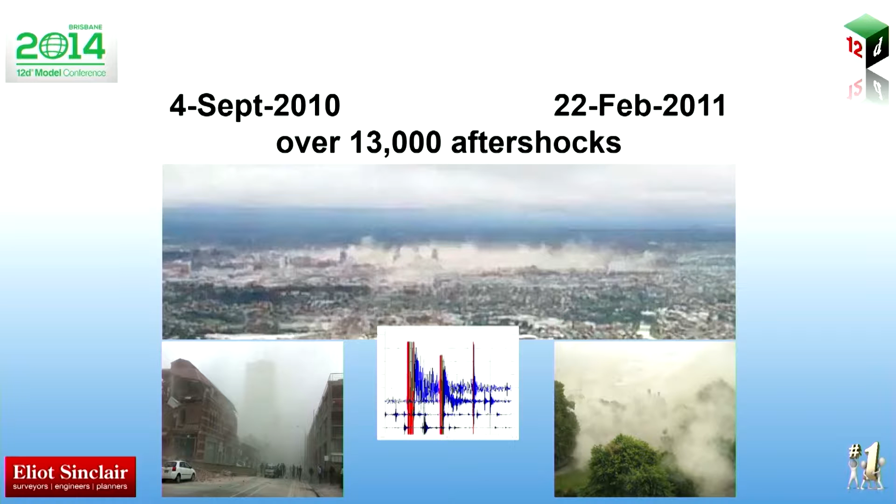The reality is that we still remember this like yesterday. It was 4:35 a.m. in September, and 12:51 just after lunch in February, the devastating quake that killed 180 people. The aftershocks, there were lots of them, but they mainly stopped. In the last 6 months we felt only the occasional quake. But most of us are still on high alert, mainly when a bus or train passes by the building and rattles it. Of course, most of you probably wouldn't have noticed that. So our lives have changed in this very short report.

Well, I hope that you find something positive after all that sadness. On a serious note, 1,000 buildings have been demolished in the CBD. It's quite unbelievable and really difficult to illustrate.

151 Kilmore Street, the Eliot Sinclair offices, pre-quake in red. The day after the earthquake, there was lots of damage: liquefaction, broken roads, collapsed buildings. Demolition followed, and construction began. Two years later, all the areas in yellow are sites that have been cleared, and all the areas in between are sites that will be demolished or have been demolished by now. The location of our old offices is now a new medical facility. This is the only building in that city block. The road is still a dirt road, but this is a sign of progress.

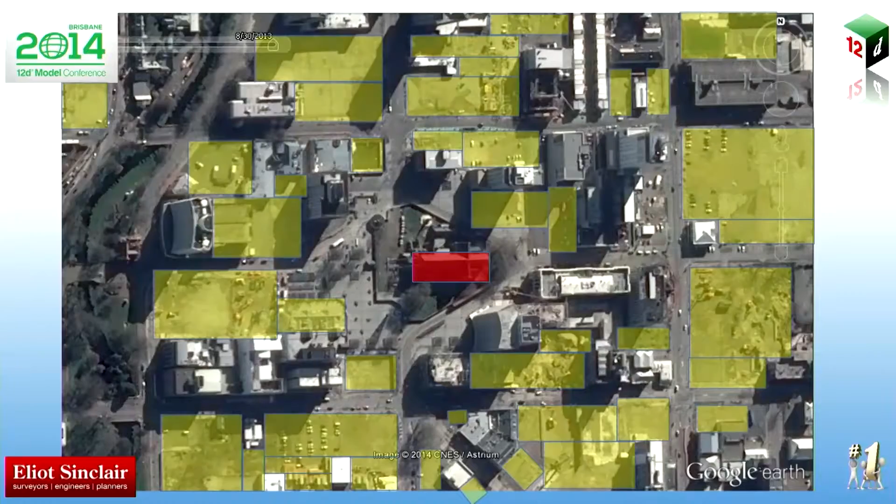The cathedral in red at the square suffered quite major damage during the two earthquakes, and the subsequent aftershocks caused the entire front facade to collapse. Again, this time last year, all of these sites have been demolished.

The Royal Commission investigated the performance of people and systems during the earthquakes. One part of the inquiry focused on the CTV building collapse during the February quake, which resulted in the loss of 115 lives. Closure for the victims' families is vital, and I hope we will see some tangible changes and accountabilities as a result.

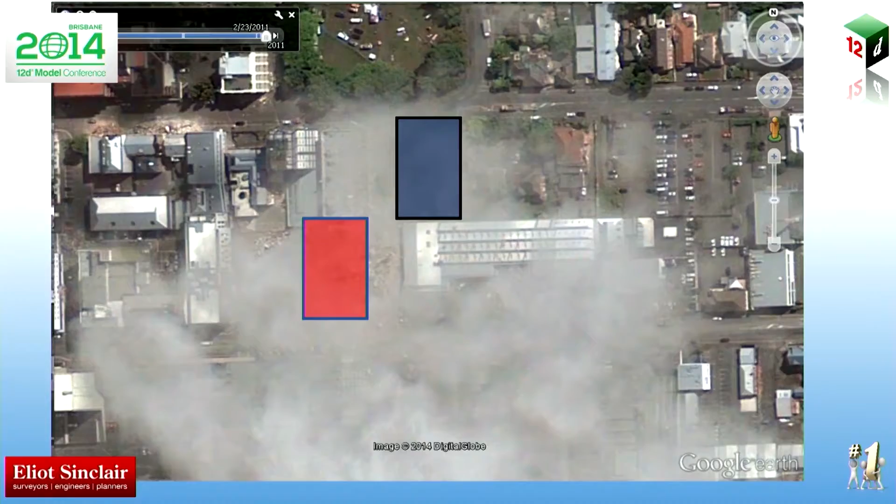The CTV building site is shown in red, and the location of the new temporary cathedral is shown in blue. It took days to check the site for survivors and fight the fires. But slowly, after the site was cleared, demolition started in the area, and soon enough you could see the footprint of the new cathedral.

And again, here are the sites that are now clear. These are just 3 small areas of the CBD, and there are many more just like these. One could say virtually the entire CBD has been demolished.

We can probably share quite a few stories about the bureaucracy, the insurance, what may or may not be covered, how you pay for insurance, and you may see little for it. Many in our city still wait to hear about their claims and where they're going. For example, my house is still under assessment almost 4 years after we've lodged our claim, and my daughters, who are 4 and 2, don't know anyone else but parents who are stressed over the claims.

But funny enough, we are the lucky ones. We have friends without insulation, with plastic for windows, plywood for walls, no cladding, and absolutely no idea where they're going. So you can imagine how depression and anxiety set in, and I'm told it is widespread.

No matter how resilient people look and how well you know them, the chances are they went through or are going through rough times. And adding to this stress are the 2014 floods in Flockton Basin in Christchurch, and just 2 weeks ago, devastating floods in Northland. So if you have families in those two areas, you've been hit twice.

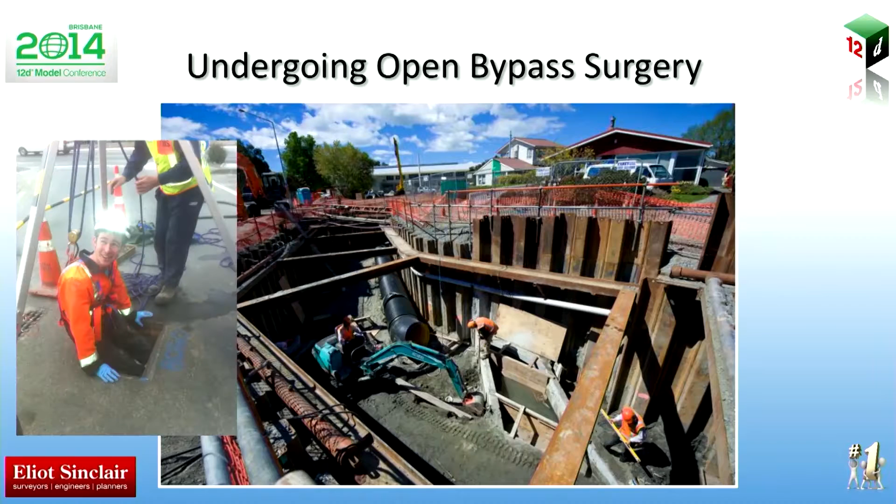It is quite vital in our city of rivers that these remain open. There's one big pipe, one big hole, and the road is closed. Measuring wastewater manholes has been a lot of fun for our surveyors, and funny enough, no complaints by the smell.

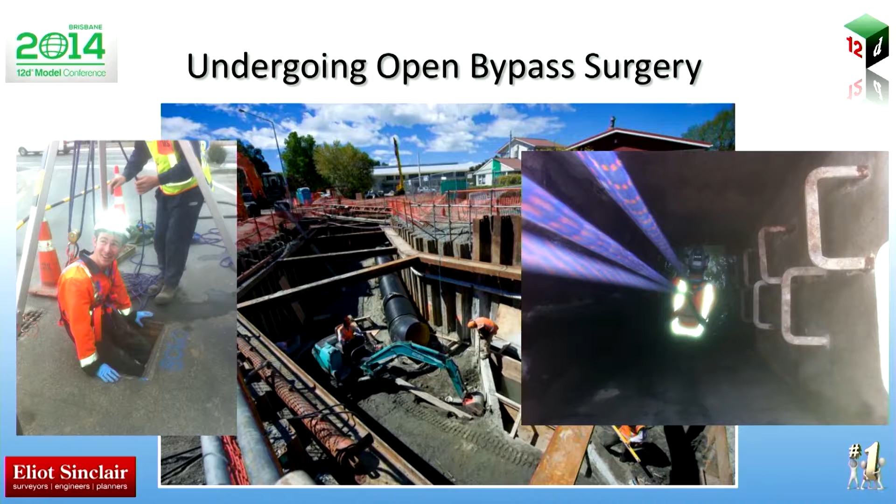The movers and shakers behind the 12D rebuild, and after 2 years of service to the city of Christchurch, everyone is slowly moving forward. We had Rosman, the drainage engineer from Woods, who is still working for SCIRT and enjoying his new role as that. Nigel is back at City Council, working on CBD projects.

I'm back at Elliot Sinclair, working for SCIRT only as required, with 2 kids. Home life is busy but fun. We have Chris Scott, the man who pushed for 12D model to be the rebuild tool and managed all surveying at SCIRT, now back at Beca as Christchurch survey manager.

We have Adam Churchill. He has joined his father in business and is running his Christchurch survey office. Charlie Dixon, the engineer from City Council, is implementing new systems at SCIRT, as well as pushing the council to do more with their 12D model. And our newest member, Dan Winter of Cardno, who has taken over custody of SCIRT's 12D systems, the CED, and its maintenance.

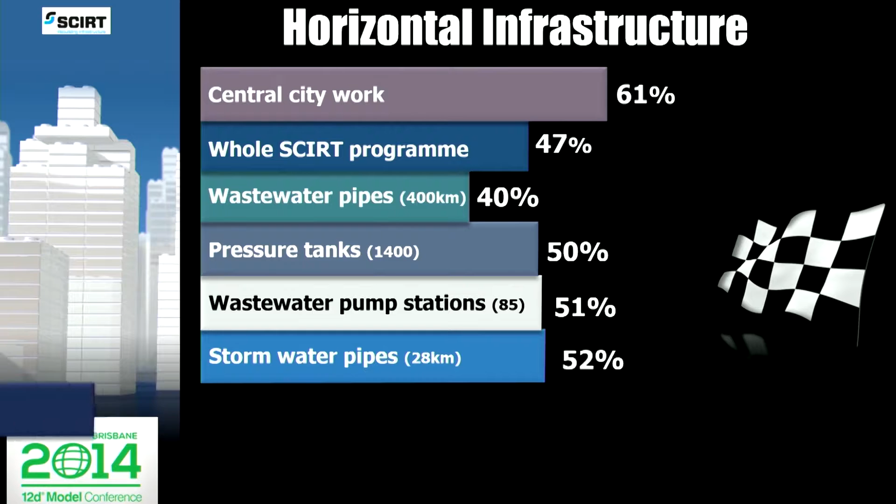We have local wastewater pressure systems being introduced into the worst affected areas as an innovative approach to future-proofing in the case of another event. To add to this, we have wastewater, stormwater and water supply pump stations, stormwater and water supply pipes, road pavement, bridges, culverts, retaining walls, and vacuum wastewater systems.

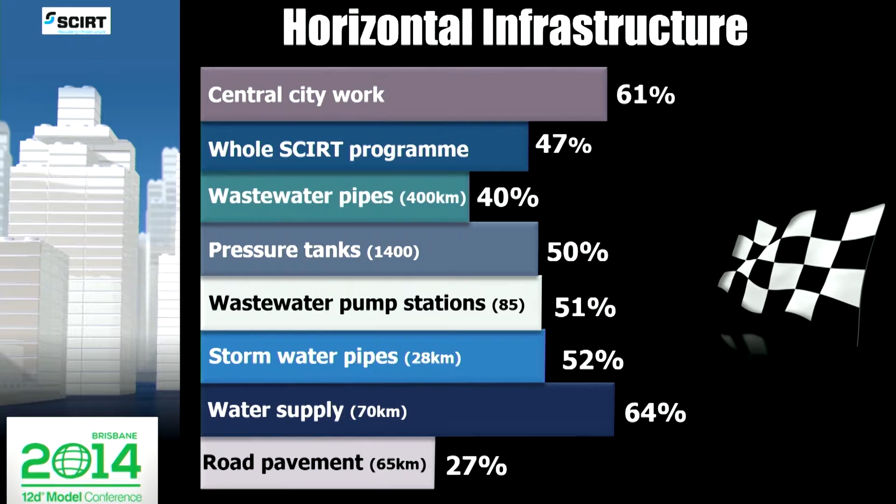At the peak of design, the SCIRT office housed a total of 300 staff, of which 180 were designers using 12D as their design tool. The combined design hours are in excess of 600,000.

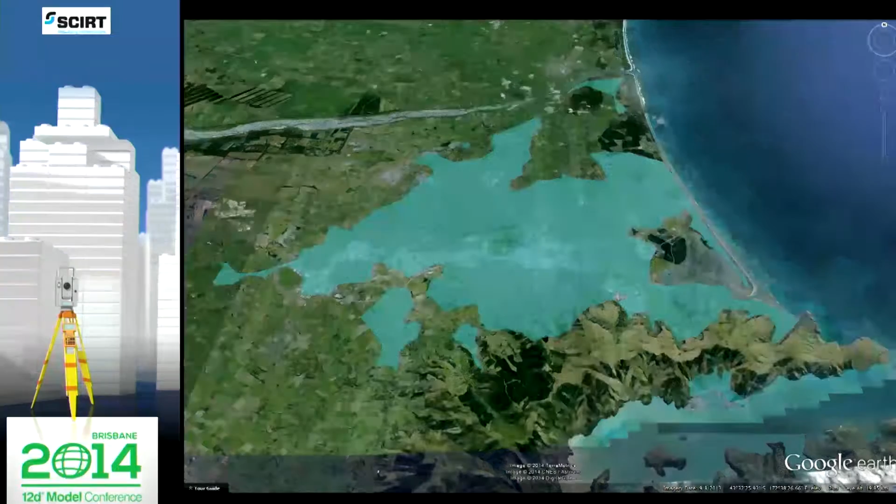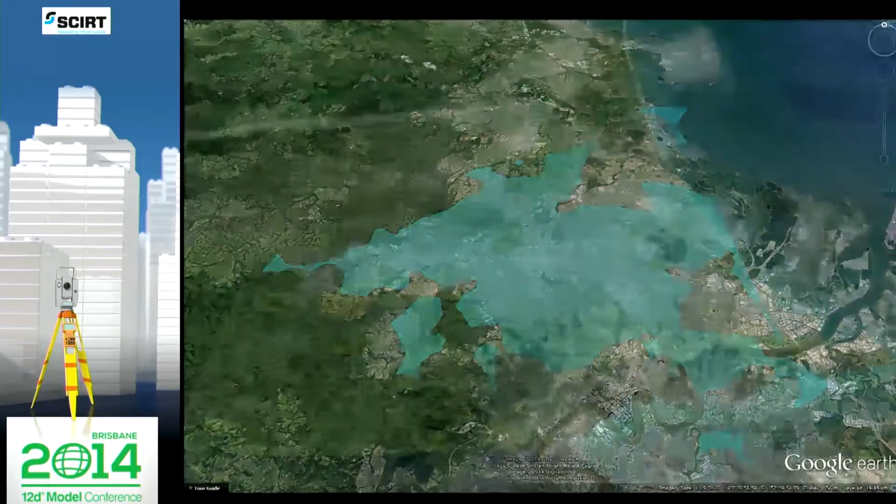This is Christchurch City, and this is the area highlighted indicating where survey has been undertaken. This is that same area overlaid against Brisbane. The total survey undertaken for the designers of SCIRT has well exceeded 100,000 hours.

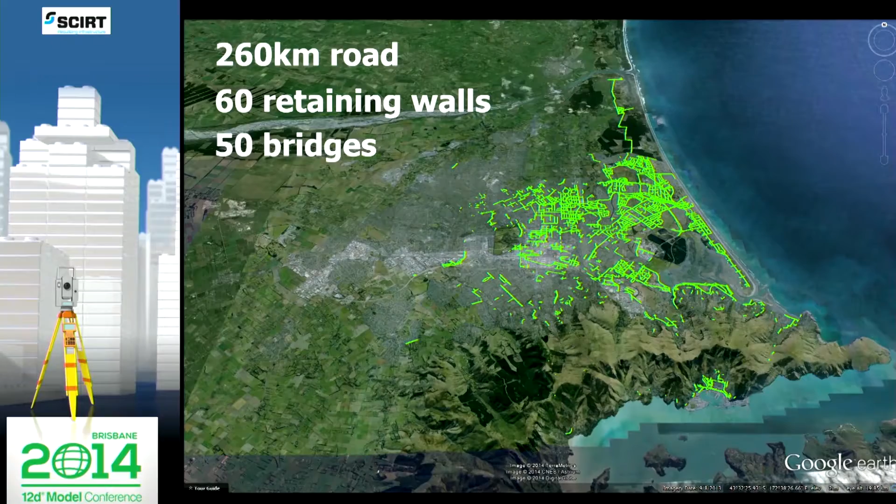This includes topographic survey, stormwater drainage network survey, and wastewater drainage network survey. Combined, over the two drainage networks, it equates to the survey of over 65,000 point assets.

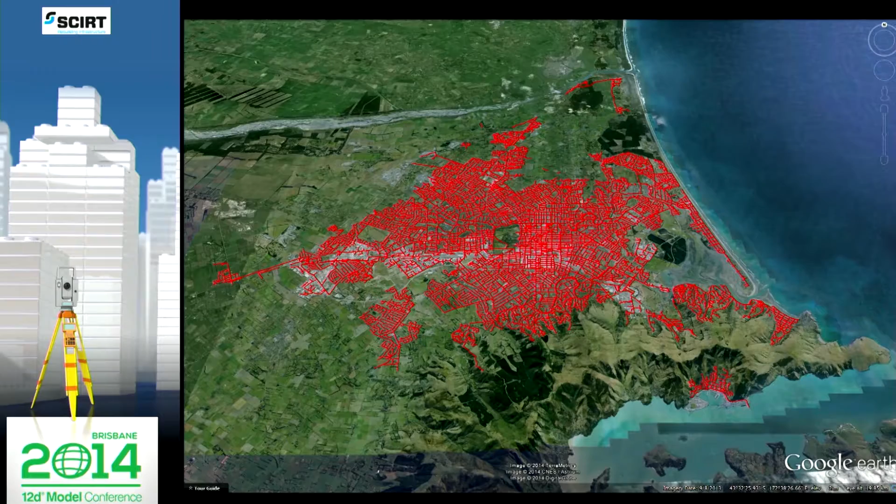How have we managed this vast amount of data? To us, it's 3 letters: CED, or the Central Engineering Database. The CED is numerous 12D projects containing links to the source data, which are updated regularly. The 12D team is responsible for the CED, which enables us to maintain one source, one point of truth, for all information required for 12D design.

The CED is comprised of survey data from 16 external survey consultants, 5 LiDAR datasets, GIS outputs of utilities including power, telecom, fibre optics and gas, etc., and the design from over 600 projects.

The basis of the entire process is string naming. It is critical that all internal and external entities are using the same terminology and codes to allow automated management of the data. For example...

The SCIRT map files and drainage.4D were provided to all external surveyors to allow self-validation prior to delivery. The image on screen shows the customized SCIRT drainage.4D. Imagine no grouping of 400 pit and pipe types.

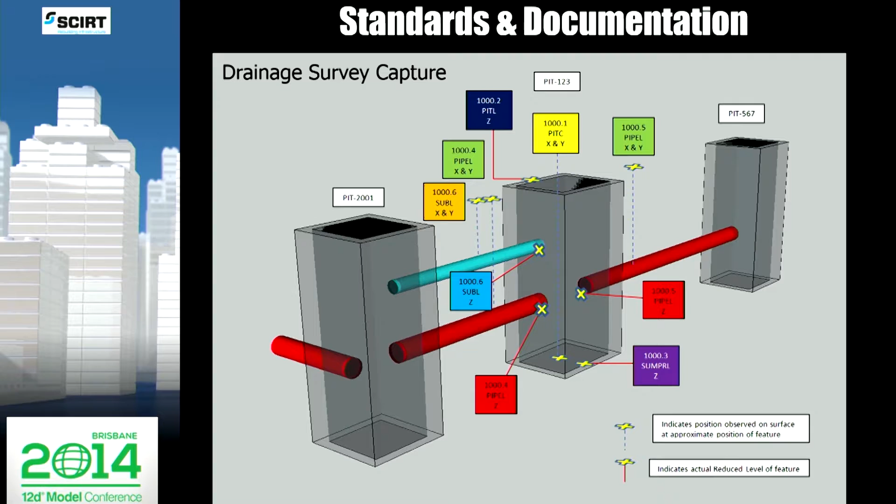Attribution is key. It enables data to be traced from survey through design and construction to AsBuilt. With the large number of parties involved, it is critical that good standards are achieved and communicated well to all. Numerous documents have been made available for data structure and capture. Shown here are some images of field capture, simplified interpretation. As the saying goes, a picture is worth 1,000 words.

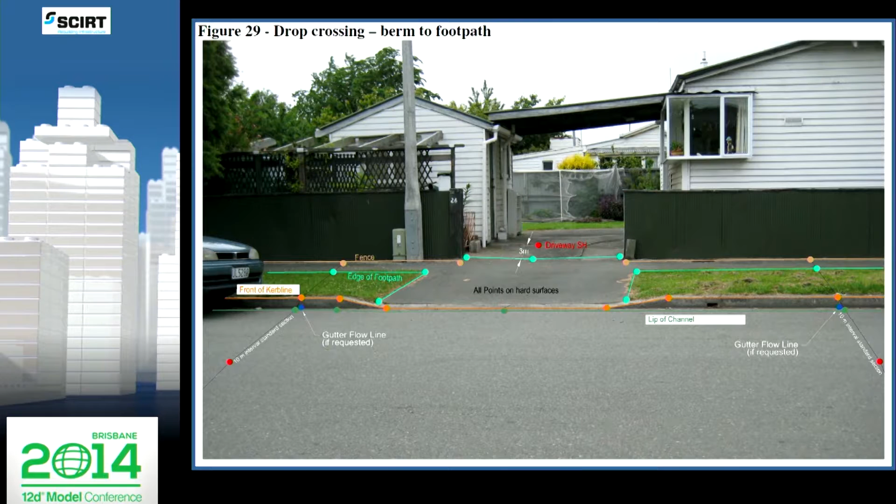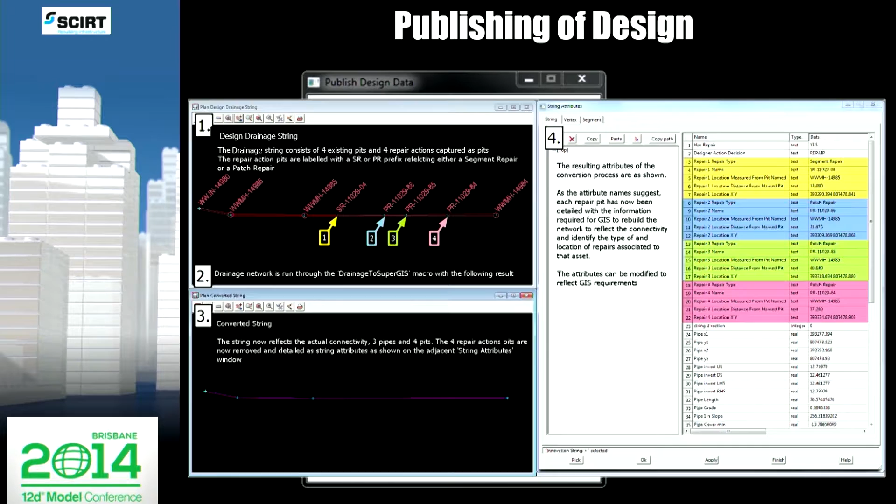Visibility of design, repair, and action decisions was crucial for forward workload planning. Given that these decisions were stored in the 12D design, we developed a macro which normalized various methods of repair capture to enable a heavily attributed output of this data to GIS via SQL.

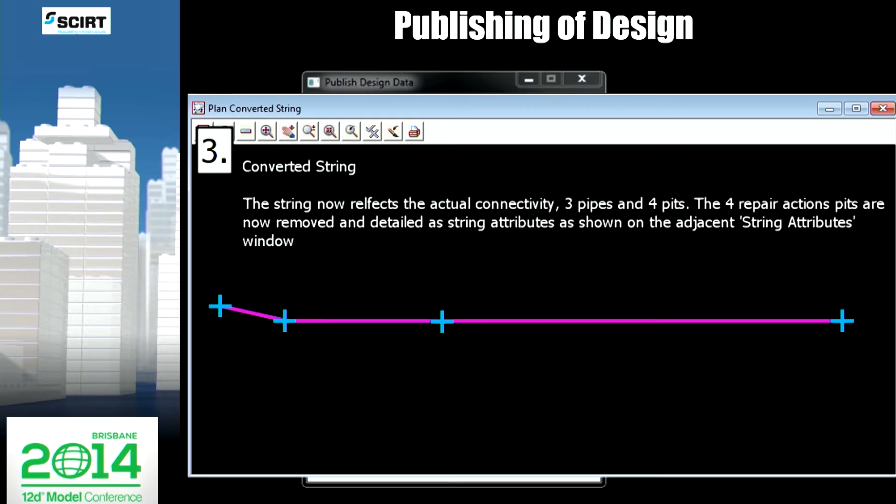Here we have a design string with repairs captured as pits. The data is run through the macro, resulting in points and lines reflecting the existing pipes, with the repair pits removed and now stored as attributes on the line strings, ready for export to GIS.

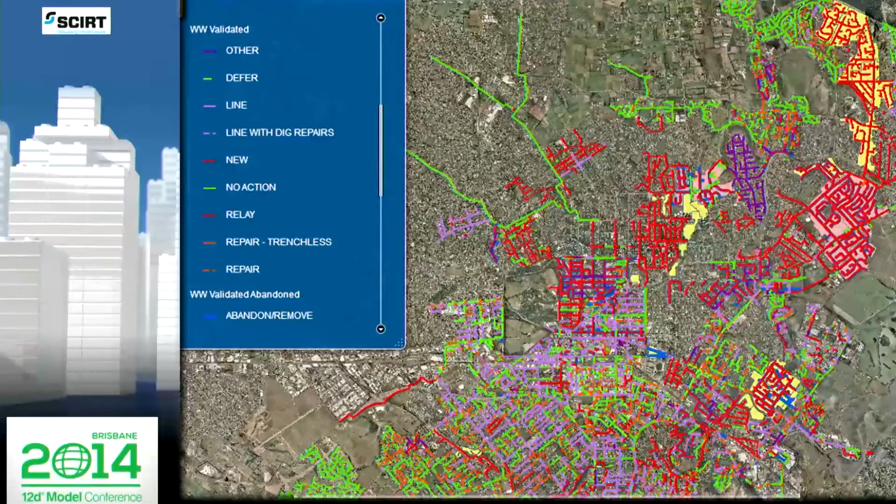Final designs can be viewed in GIS web maps, and this is a dynamic link which 12D updates GIS on a weekly basis. Naming conventions and data attribution enabled the development of custom tools for design, data transfer, and to support business intelligence processes.

I now invite Charlie, who is juggling the AsBuilt system, to tell you more. Thanks, Dan.

Innovation is defined as introducing something new. There are no qualifiers of how groundbreaking or world-shattering that needs to be, only that it needs to be better than it was before.

Existing AsBuilt requirements for the Christchurch City Council are no longer fit for purpose. These have led to inaccuracies and varying interpretations for data deliverables to Council. The aim of the SCIRT AsBuilt system is to clarify the requirements, standardise the process, simplify data capture, and speed up the process.

So SCIRT developed the Survey AsBuilt system. Its primary aim is to minimise error deliverables. It's worth noting that lessons have been learnt from the survey topo process developed by Survey Manager Chris Scott.

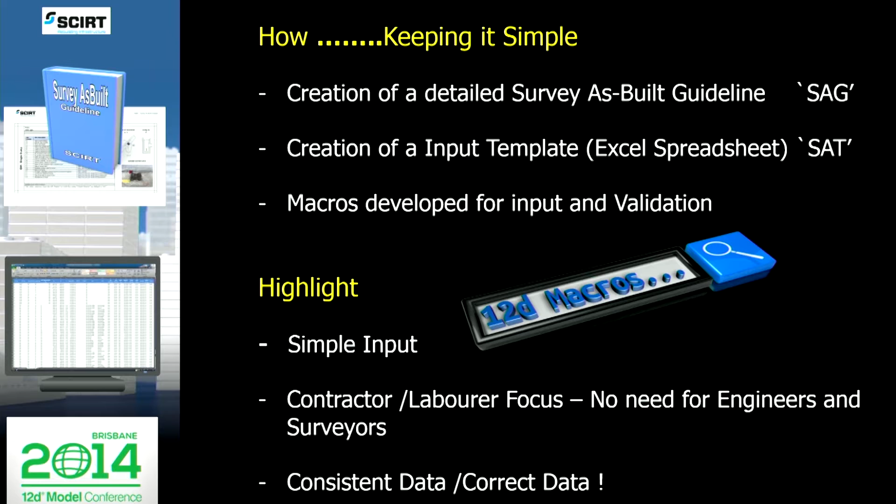Building upon that knowledge, we didn't have to reinvent the wheel. The system is made up of data capture in field, validation process, and deliverables to GIS.

Why so great? Because any contractor or foreman can capture data. The process introduces a strict data flow which ensures there is one point of truth for revision control. The contractor uploads the SAT to SCIRT.

It's loaded into 12D, and a validation is carried out. If it doesn't comply, a report goes back to the contractor for revision. If it complies, final AsBuilt drawings are created and delivery of data is made to GIS.

AsBuilt macros are the heart of the process, engineered and developed by the 12D team. These are made up of the input AsBuilt macro and the validation macro. 12D macros have greatly sped up the process.

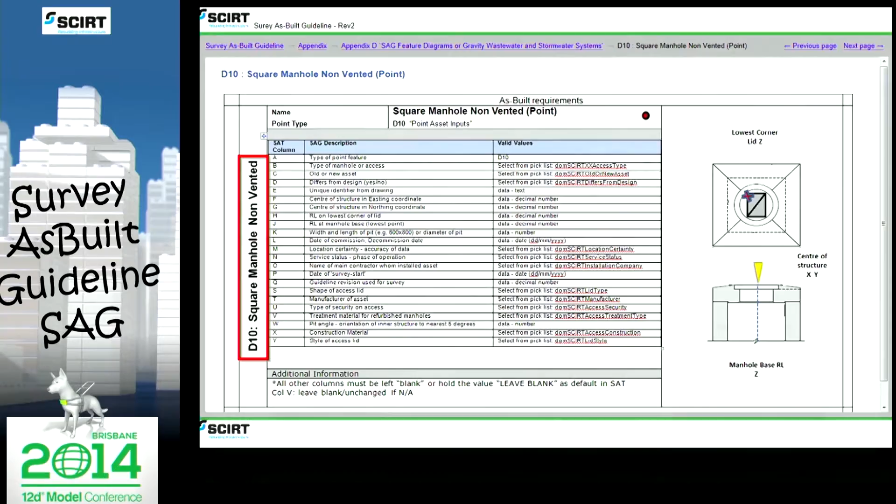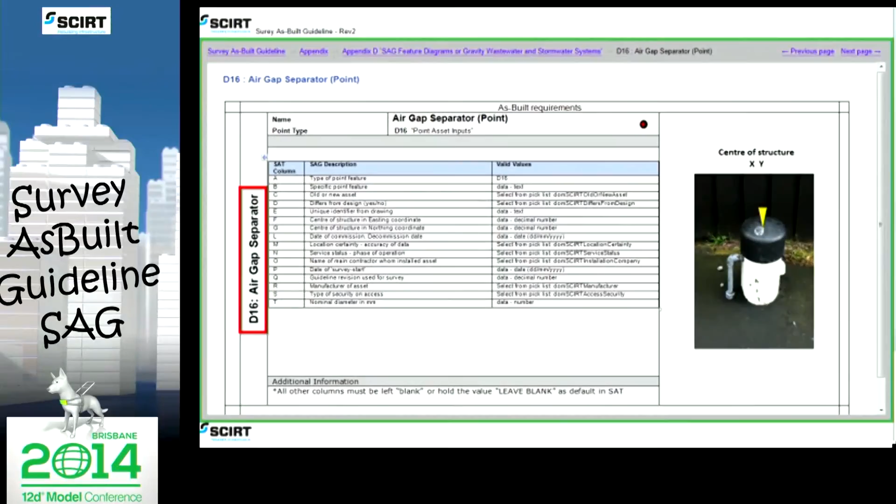The Survey AsBuilt Guideline, or SAG, defines the requirements for the contractor and delivers the details and deliverables for wastewater, stormwater, and water supply networks. Compliance with the SAG is critical to the success of handover information to Council.

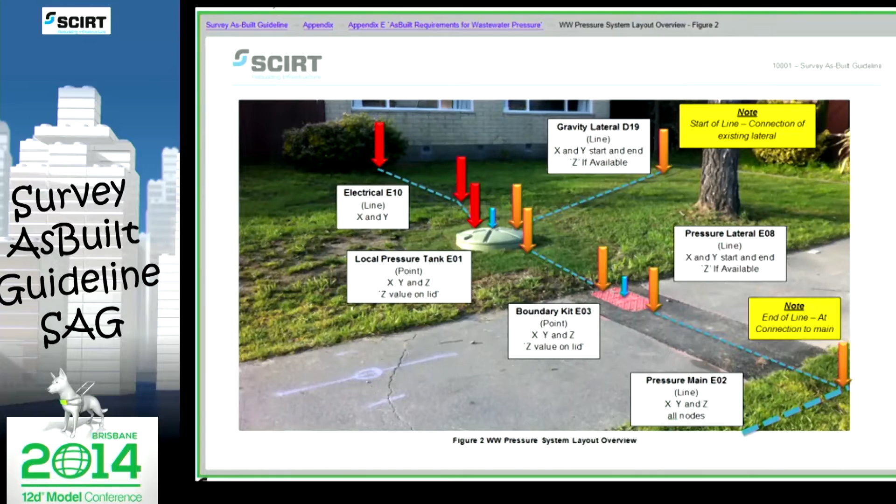It's continually being revised and is expanding. The original draft was 35 pages, and now it's over 120.

Simplicity is in the use of an Excel template. The data includes all geospatial and attributed data for both points and lines. There are two components: geospatial data and attribute information.

The outputs: a drainage network, geometry for all wastewater, stormwater, and reticulated systems, which are fully attributed, plots, GIS-friendly strings, and validation reports.

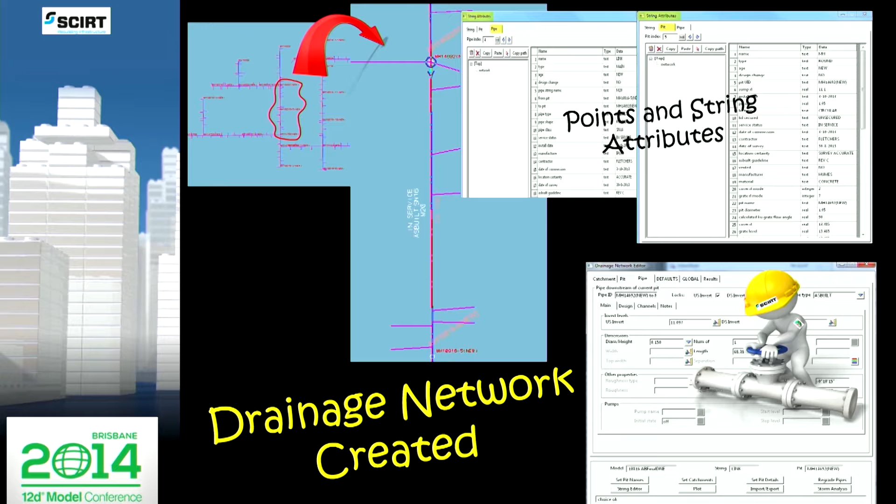A fully integrated drainage network with correct drainage flow, completely attributed where all segments are connected. This allows the automation of the drafting process and the ability to review data easily. The pits and pipes are attributed as required by the SAG.

Creates complex geometry for pressure, vacuum, and reticulated water systems. Plots for review ensure data is easily identified by the contractor.

Attributes enable us to highlight differences between design and AsBuilt. These are typically design changes, pipe types, and pipe grades. A segment number is a line reference in the SAT, and this ensures full traceability of data and speeds up the process.

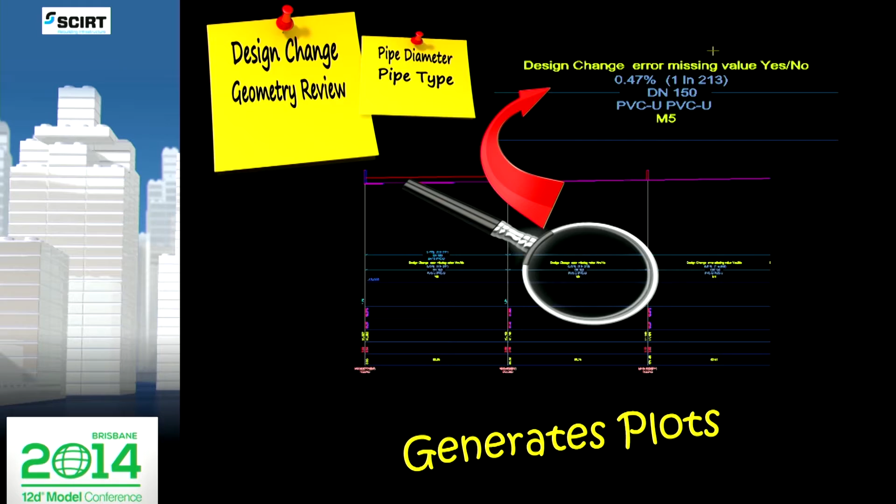Another tool for review is using the perspective view for clash detection. It clearly indicates conflicts such as crossing pipes and null values, and this is also quick to review.

The validation report simply shows what's different from the design to what's actually been constructed. A report is generated which highlights the differences: pit names, pit coord differences, pipe inverts and grades, comparing design grade to AsBuilt grades. The contractor is able to easily compare design data and AsBuilt data side by side in the AsBuilt report.

The SCIRT system is here and has been proven in the SCIRT environment, and it's important not to stand still. Updates to the guideline continue, such as new manufacturers and updates to specifications. Workshops continue to inform and update users. No surprises, and everyone's on the same page.

The drafting process - our goal is to output directly from 12d, which is a closer step to the automation of the AsBuilt system.

ADAC, as designed and as constructed, is an Australian standard for data capture, which is now available in 12d. The SCIRT AsBuilt system can be modified to bring together our innovative capture with ADAC and can deliver an even more standardised process.